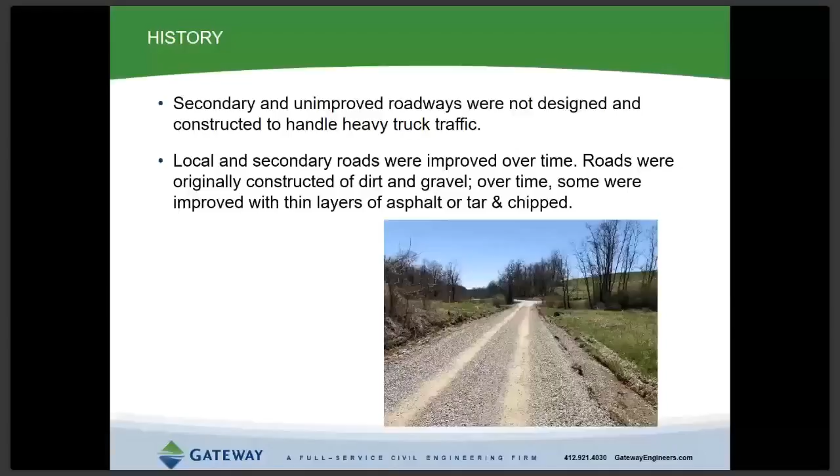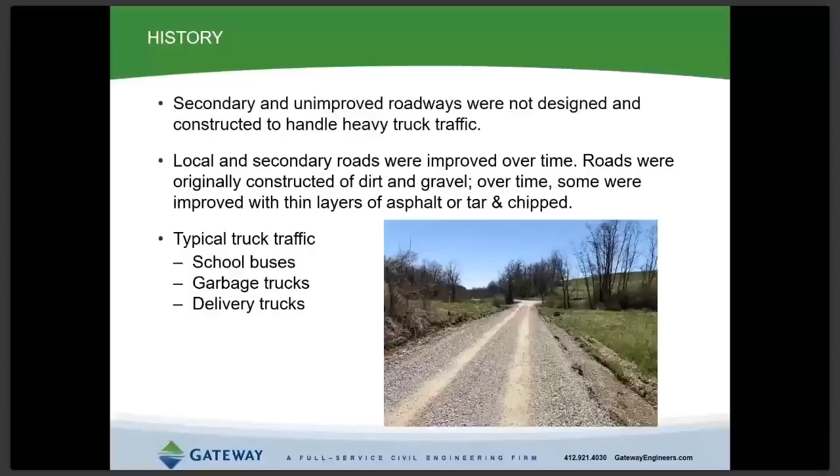It seems road improvement projects certainly develop, and road systems improve closer to the urban areas. On these rural roads, the secondary and unimproved roadways were not designed to handle heavy or excess traffic. The local and secondary roads were improved over time. They were originally constructed of dirt and gravel. Over time, paths were improved to travel sections, and then as time moves on, there were possibly thin overlays of asphalt or tar and chip. On these local rural roadway systems, truck traffic consists of school buses, garbage trucks on occasion, maybe delivery trucks. But the traffic counts are certainly down, as well as the size of these vehicles.

So what's new? The increase in natural gas drilling activity in Pennsylvania over the last 10 years is what's new. What does that consist of, and what impacts does the development of energy have? It's well pad development, drilling operations, completion operations, and pipeline construction. It's more so than just well pad development that seems to be at the forefront of it.

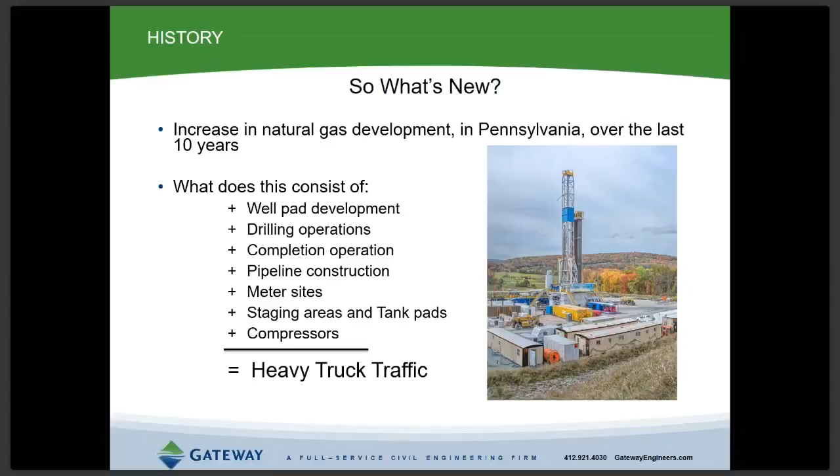Some of these components of development are considered a short-term project, meaning there's limited time to start construction until it's up and operating. The heavy truck traffic is needed in the forefront, then tapers off at the end and is handled by service vehicles. Other components, such as the well pad, maybe even a little on the compressor side, the truck traffic will continue for some time.

Some of you may have seen this in the last 10 years. What's a local government to do? Looks like a queue of about 25 water trucks.

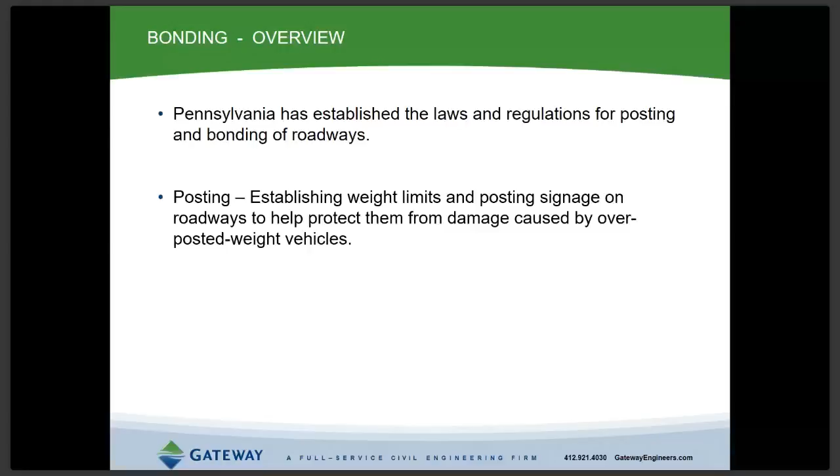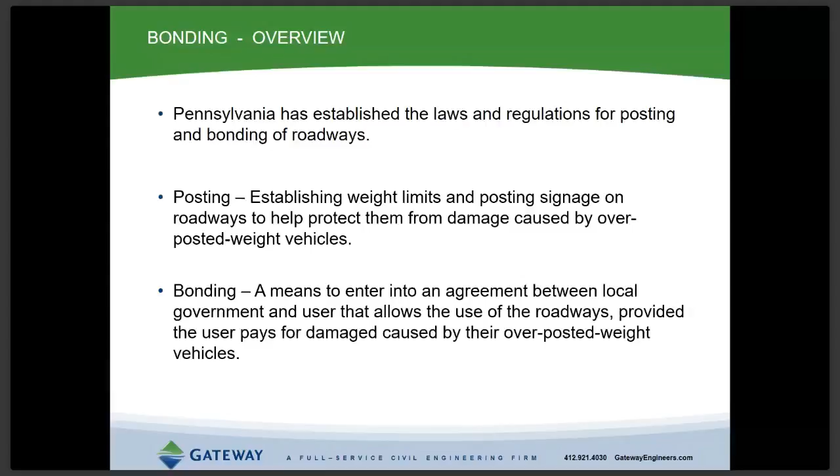The good news is Pennsylvania already had laws and regulations established for posting and bonding the roadway. Simply put, posting is establishing weight limits and signage on the roadway to protect them from damage caused by over-posted weight vehicles. The other component, bonding, means entering into an agreement between the local government and the user, the operator, the hauler, to allow for the use of the roadways, with the understanding that whoever is using them agrees to pay for damages caused by the heavy over-posted weight vehicles.

To post any roadway in Pennsylvania, it's recommended that you follow PennDOT Publication 221. It's a very good publication as far as the details described, including the forms and documents included as examples. I believe there are 6 procedures outlined in that document. We're not going to discuss each and every one, but there are several we'll take some time to review in a little detail.

First and foremost, under number one, the engineering and traffic studies. These are required upfront, in the initial phase of the posting and bonding procedures. There's an outline in Publication 221 of PennDOT that goes into great detail on what's required. On the initial engineering side, you're going to look at the vertical and horizontal clearance of the roadway, maybe even the turning radii.

You check past experience with highway breakup. That's probably more applicable to PennDOT, since a lot of the smaller local communities might not have a lot of history there. But what that means is determining, when reviewing and preparing these reports, how the road has reacted when used for hauling and truck traffic in the past. If there's a history of it, certain features and characteristics of that road would be incorporated into your study.

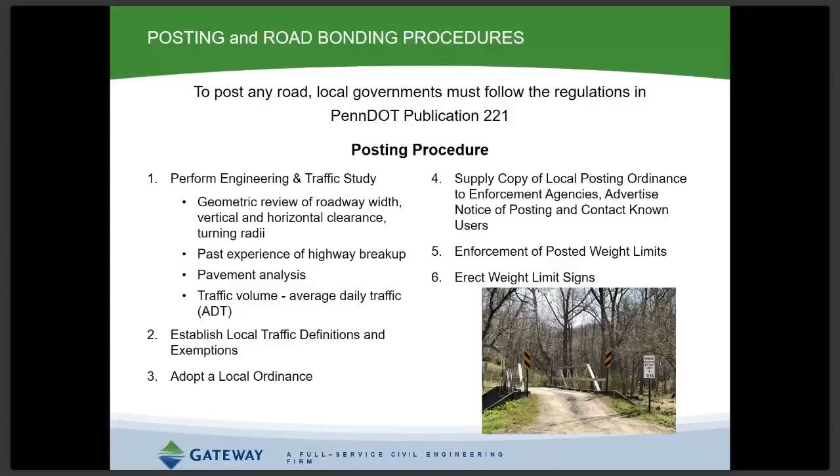There's a nice little bridge photo in the lower right-hand corner, more or less with a weight limit of 4 tons. Just so you know, posting of that bridge falls under a different section of PennDOT. You wouldn't find that under Section 221 — it would be found under Section 191.

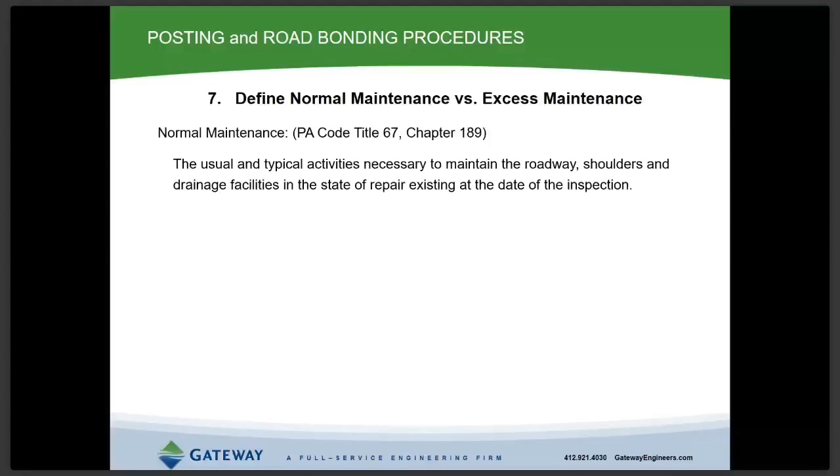Under item 7 is defining normal maintenance versus excess maintenance. What is normal maintenance? It's the activities people typically overlook on an existing roadway, prior to any bonding or excess maintenance agreements established for that roadway. That would be your inlet and culvert cleaning, for instance, shoulder grading, line striping, and snow removal.

Excess maintenance would be described as anything other than what was normal. If there's damage caused to it over time from heavy loaded overweight vehicles, that would be included in excess maintenance. Problems with the piping network, say it's crushed pipes, edge damage along the roadway, or even some instances, possibly even the reconstruction of that roadway, would be considered excess maintenance.

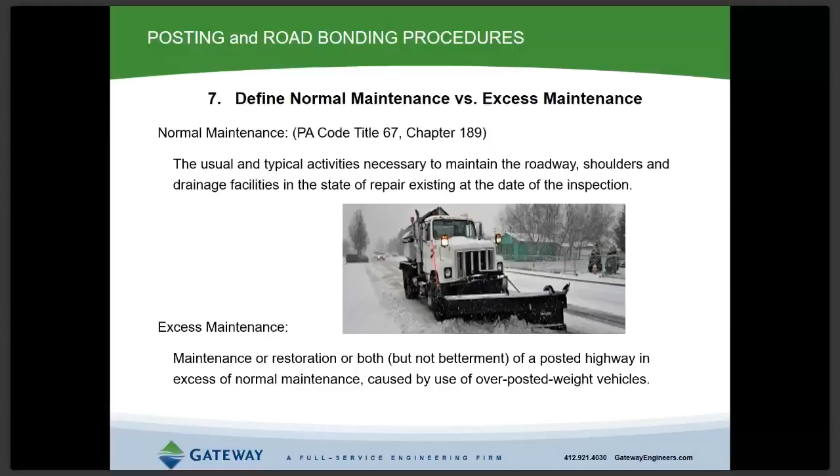Similar to bonding, it legally binds the hauler or the operator to be financially responsible for any repairs or damages that would occur to the roadway.

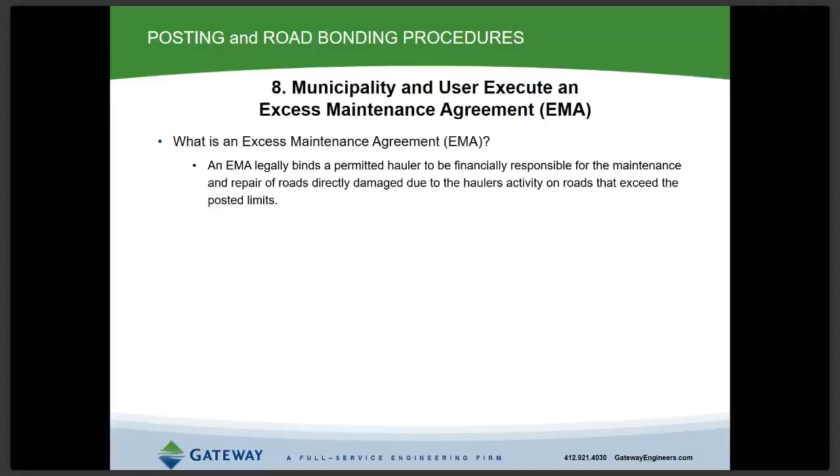In that document, there'll be three different types of permits available. Permit 1 is only going to be valid when it's carried in the vehicle itself. Permit 2 would be something that would be used if an operator or hauler would be using third-party services, when it would be impractical to have those permits located in the vehicles, but it'd be displayed at the place of the business.

Permit 3 would be used if there were several roads in and out of local government or the municipality that would be utilized. And not to be mistaken to point out that it's not a blanket permit for all roadways within the LG.

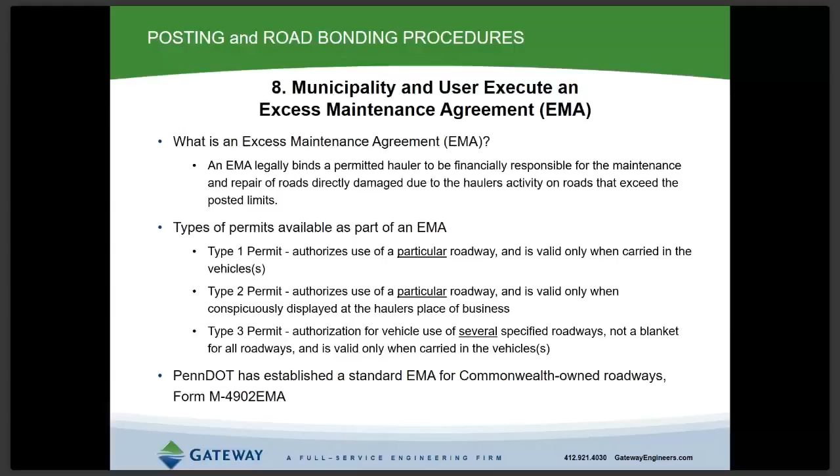Standards can be found on PennDOT's website. The M-4902EMA form, certainly beneficial moving forward.

We move on. We confirm under number 9, who determines who performs the road repair damage once the EMA is entered into and all parties have signed. What we typically find in our experience is the user would arrange and pay for the repairs. I suppose on occasions the municipality might see that it has benefits of doing that themselves, but it's just something that we normally don't run into. I don't know that they need to be into the road repair business.

Under number 10, we do run into this on occasions. The municipality or local government would notify the users of what's intended. Typically, we'll run into areas where you'll run into multiple companies utilizing the same roadways.

It's always recommended, PennDOT will do the same thing, that they have the haulers work it out. More or less, you stay out of that work and put it back on the haulers to determine who's going to take care of the maintenance and so on. Our experience with that, it's worked out really well.

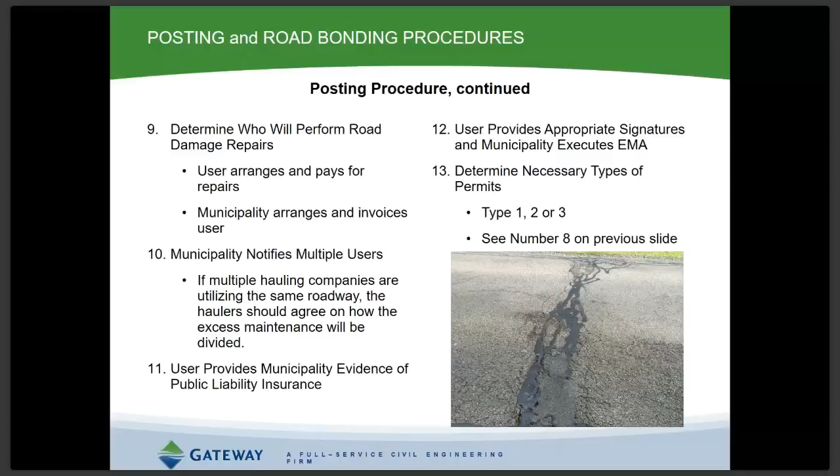Typically, impromptu meetings, the determination on who's paying and how it's going to be controlled just essentially gets worked out on the side of the road.

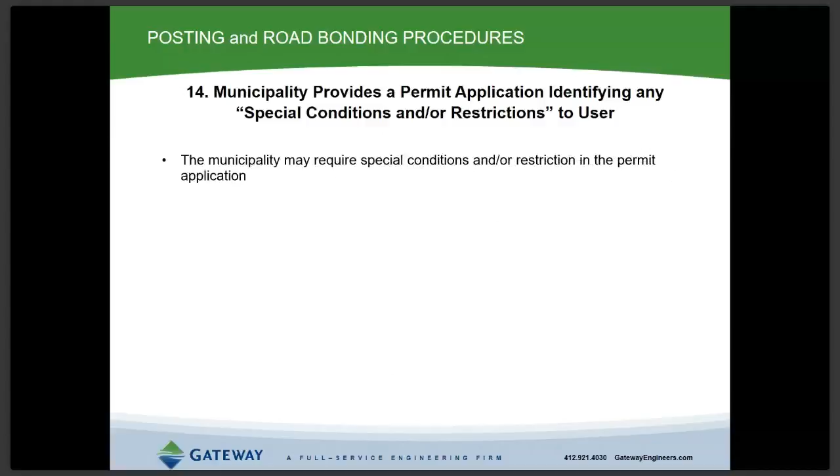During the bonding process, the municipality provides the permit application, identifying the conditions and restrictions to the users. This is a good thing. This is a time where the municipality can have additional influence on how they want things addressed and how they want handled.

Certainly, at this time, the municipality may require, we recommend that they do require the user to provide a maintenance plan. That maintenance plan is going to outline the minimum requirements, what's expected.

It's going to describe the results of the original initial inspection, periodic inspections, frequency of those inspections. In some situations where it's low trips per day, it might be a situation where that roadway only needs inspected maybe once a month. However, on high volume usage, it might be something as often as 2 or 3 times a week, maybe daily.

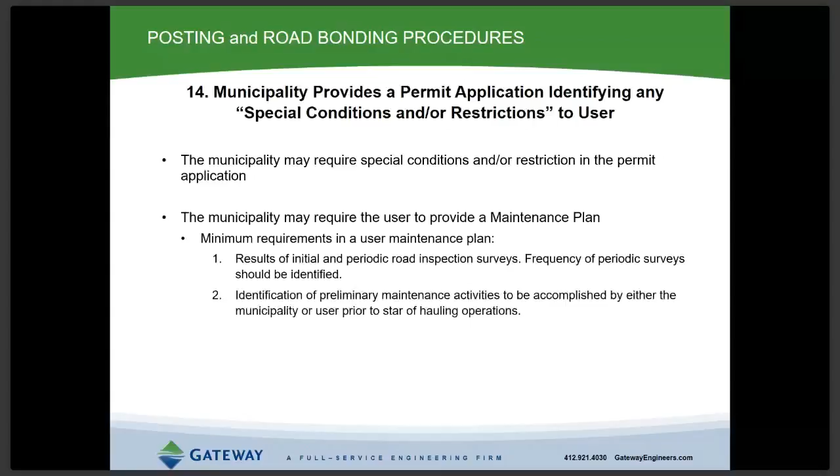It's going to identify the preliminary maintenance activities prior to the hauling operation. It's going to establish, determine who's responsible and the priorities of those repairs.

It's also going to provide an evaluation, an agreement on the alternatives that are going to be used for different distress types. I call this developing a cookbook.

Contains a lot of ifs and thens. Essentially, what's going to occur when we have the shoulder breakage? It's going to be a mill and fill situation. What's going to occur when the intersection begins raveling? And so on. It's just going to give you a general outline that can be used by both sides, from the user to the local government.

Maybe most importantly is item number 5, the response times, and what the expectations are there for the non-emergency repairs, as well as the contact and routine for the emergency maintenance repairs. The goal of this whole process is to keep the roadway surface suitable for safe travel. I think both parties are interested in that.

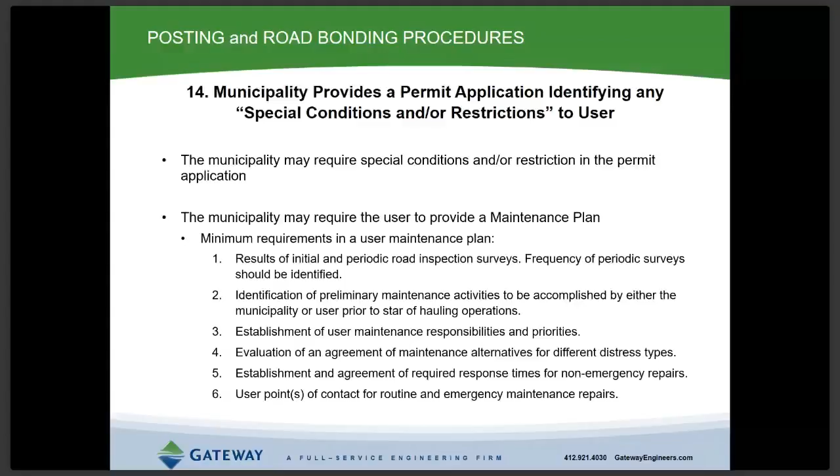Those amounts haven't changed for years. They are on the low end. Certainly, once repair and reconstruction starts to occur, those values there would quickly be exceeded, and we will mention and discuss that later on in the presentation.

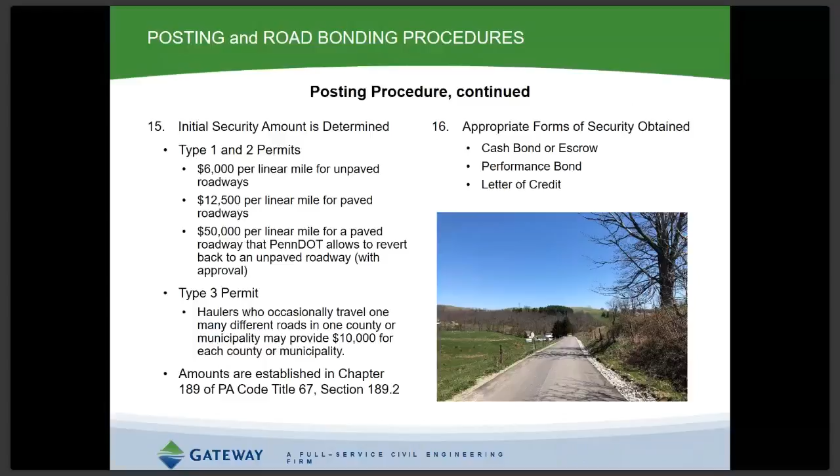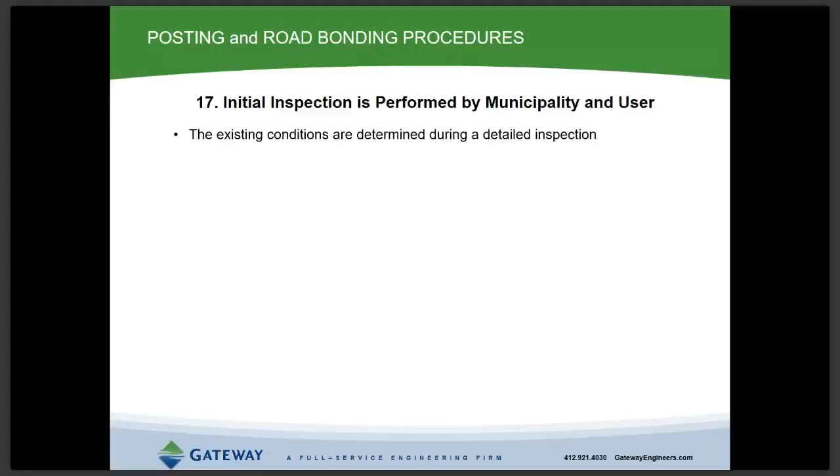Quite possibly the most critical part of the whole process is the initial inspection. Existing conditions are determined and detailed. Certainly take a lot of notes during this inspection. We recommend that both sides of the agreement are present to review that.

Essentially, once the bond is in place, the hauler or the user is only responsible for additional damage. If the road's in poor condition to begin with, they're not responsible to improve that at that time. So you certainly want to note all defects in those inspection reports.

We always recommend walking the roadways. We've seen it done in numerous ways, but you certainly note more information if the roadway is physically walked. That gives you the time to take a look at the culverts that people typically overlook, and drainage systems. But you certainly want to do that.

We recommend the use of video, whether it's a GoPro or handheld cameras, to document. I don't think there's any such thing as too much information when it comes to recording the existing conditions.

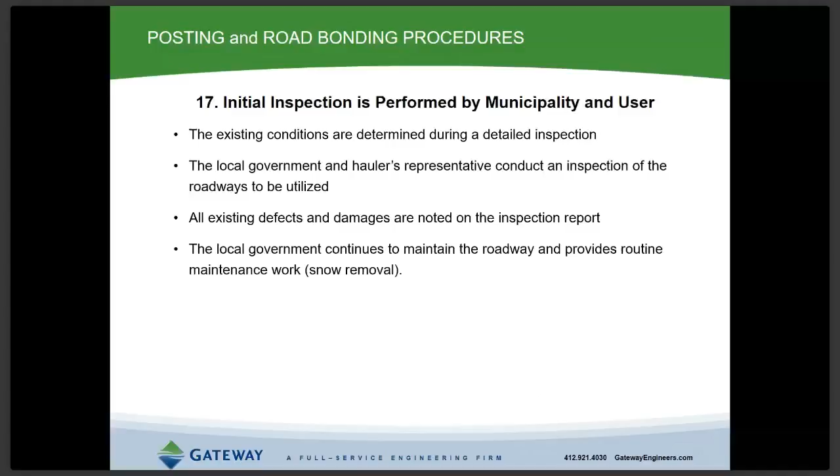One thing to note is during the EMA, the local government still is maintaining the roadway, and it continues with that maintenance work, that's snow removal. We have run into a few situations where once the road was posted and bonded, all activities stopped, and they tried to push onto the operator to handle the snow removal as well as the vegetation cutting and so on. So that is still their obligation as part of that.

As we touched on earlier, the hauler is not responsible for the existing conditions of the roadway prior to any work starting. One more note, make sure that you inspect the culverts and the drainage features. They may even be short span bridges that aren't posted. Note the condition of that.

Problems always seem to appear after the work is done. Just note for everyone, if there is a problem with the culverts or they need to be repaired or replaced, as the EMA is executed, having a bond in place doesn't relieve your obligations to have your 105 and your 102 permits in place.

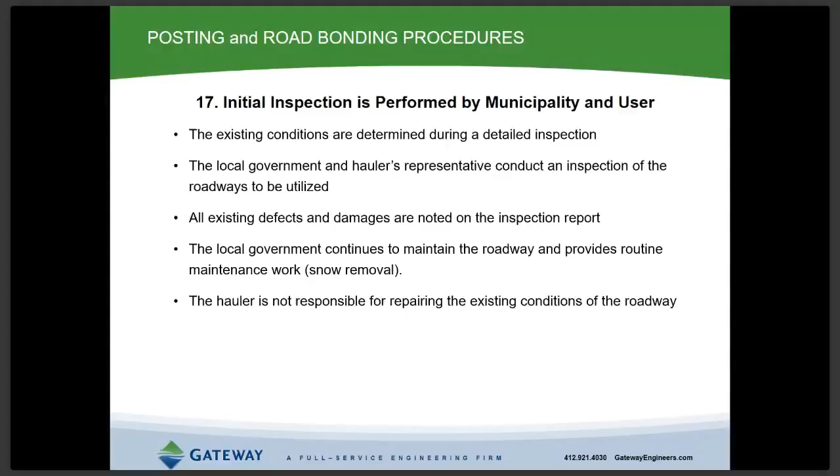Note the existing conditions adjacent to that roadway, whether it be a fence, mailbox, driveway, monuments, or pillars. Certainly record that. Who knows what will come up after the fact. It might be a good way to determine what the conditions were and if damages actually did occur.

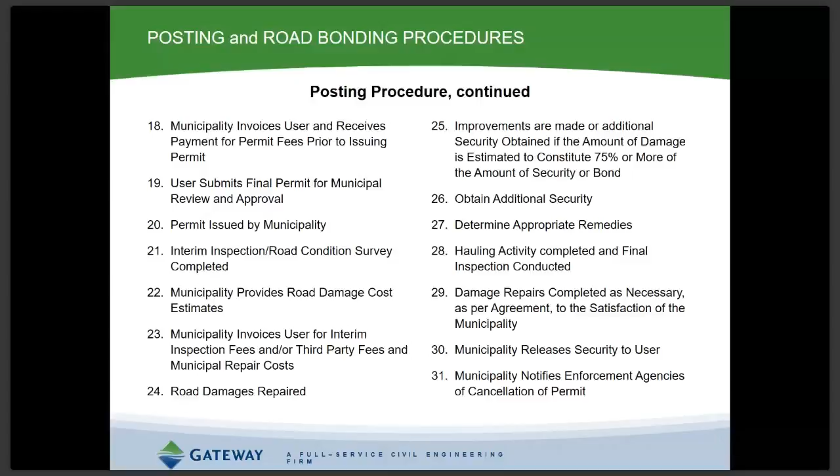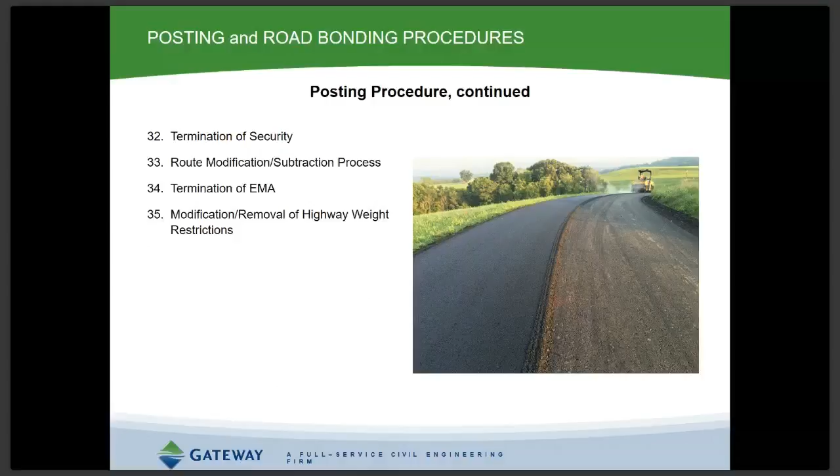Project success comes from cooperation between municipalities and operators. We use the 3 C's here at Gateway: communication, coordination, and collaboration.

Successful projects have all 3 components of the C triangle in place and executed. Under communication, we suggest opening up the lines between the local government and the operator, the hauler. Share schedules. It certainly helps with the stress felt on the administration side of the government, as well as on the complaint side of the operator.

Under coordination, especially when there are several different operators working in the area or sharing the same roads, there's internal and external coordination inside the hauler's place of business. There are many different components to it. So coordinate the repair activities. It seems simple, but you'd be surprised how often that comes up as operations change on the location, or as different phases of development occur. As truck traffic goes up, you'd be shocked how often that's exactly when the repairs are scheduled to occur.

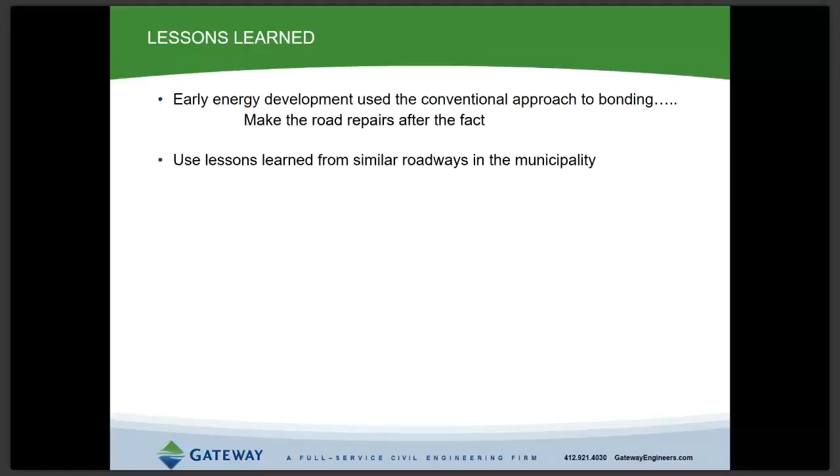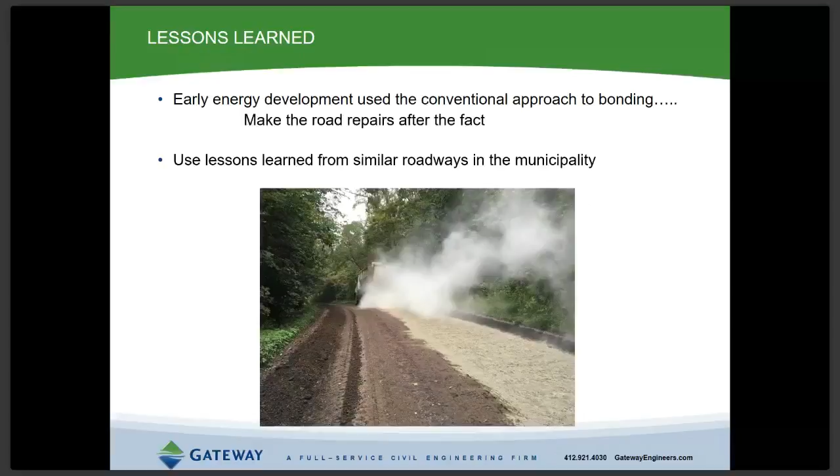Use the lessons learned from similar roadways in the municipality. This is a photo of base stabilization occurring, where cement additive is added to the roadway section. On these dirt and gravel roads, a very limited amount of base material was placed during original construction, so this gives you an adequate hard surface to work off of.

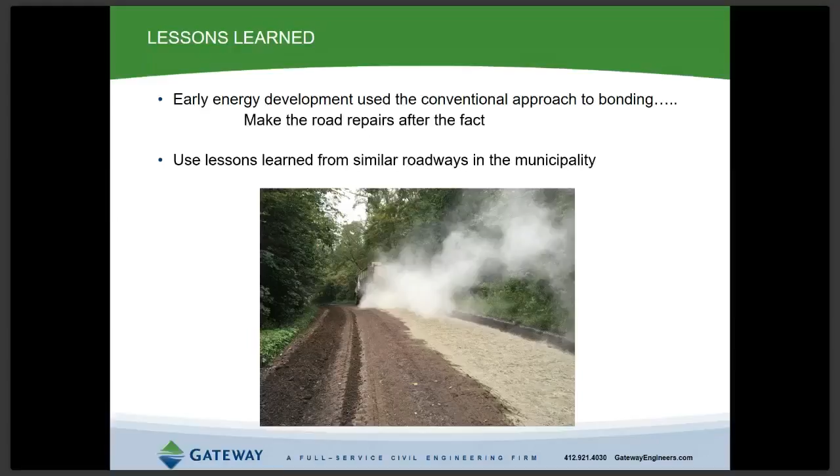Lessons learned from similar roadways: as energy development continues, it's not going to be a one-time project in your municipality. There will be other well sites or other components of that. Working inside that municipality, you'll have history on numerous roads throughout the area, so why not take advantage of that information ahead of time?

As energy development has matured, it's a good time to plan ahead. We always raise the question: why not make road improvements before the initial construction occurs, at the onset? Use the history you have. Typically in rural communities, the original construction process was essentially the same, and your soils and subsoils aren't going to change drastically. So you can anticipate what kind of damage will occur while that roadway is under heavy traffic loading. We've done this in the past and it's worked very well, but it does require planning.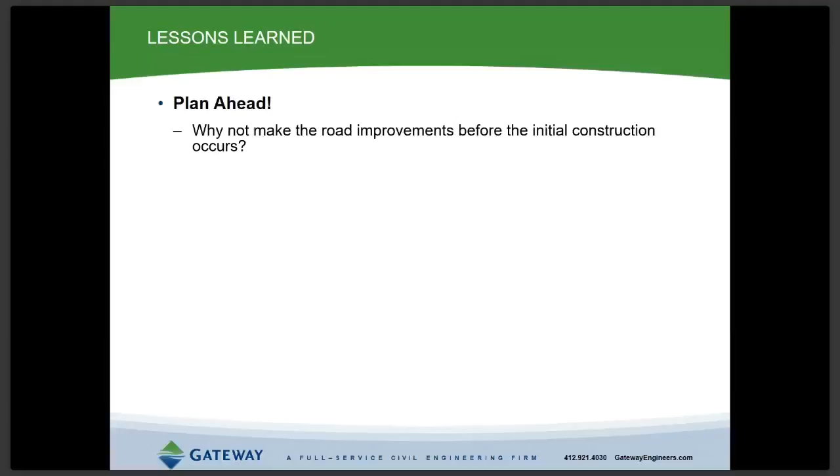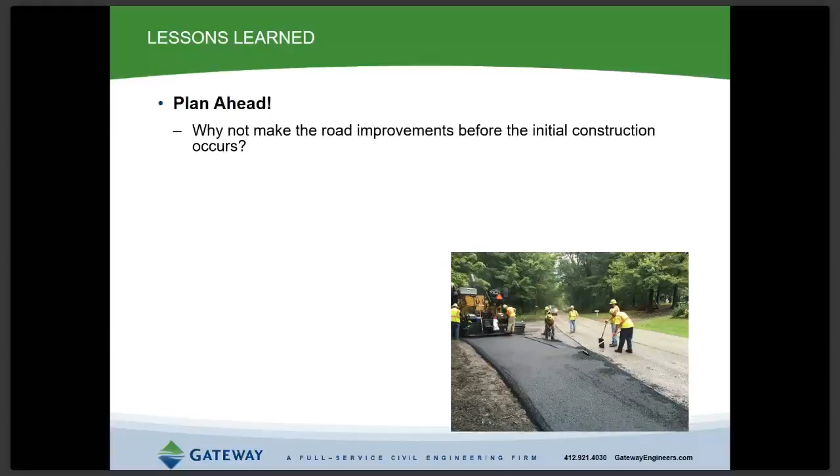You can move into that roadway, make your drainage improvements, stabilize your base, or do edge fillings and millings and fillings, install under-drain systems, and then go ahead with the initial paving.

Benefits that'll occur from that: certainly your local residents who use those improved roadways will be happier with the situation. It assists local government staff by reducing public complaints, and assists with traffic flow over the improved lanes. It also gives you a chance to modify the road geometry, possibly widening out existing narrow roadways so vehicles can pass safely - both the haulers' vehicles and the locals.

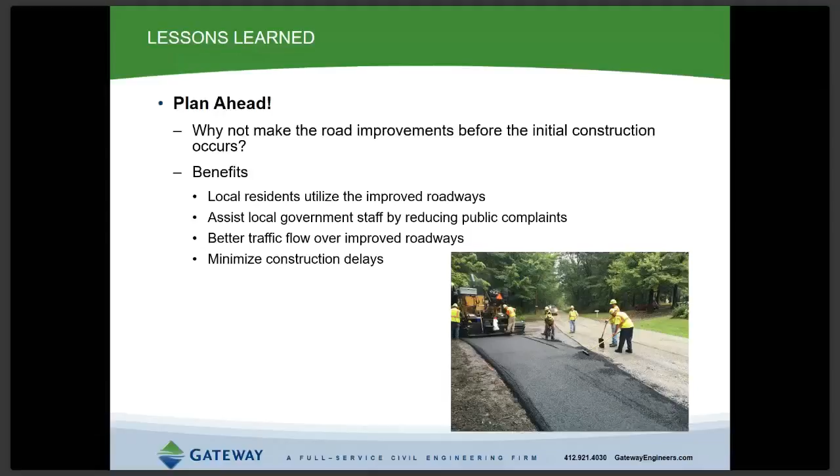Minimizes the construction delays. Quite often, as wells or as construction is released for construction, as the activities occur, here in Pennsylvania we're always trying to do a year's worth of work in about 5 to 6 good months of weather. So for energy or even heavy highway work, we're always pushing the weather limitations to gain as many days of construction as possible. There's nothing worse than starting projects late in the fall on the onset of winter and then finding out that the roadways aren't going to hold up. The roadways will cause maintenance headaches and nuisance issues throughout the wintertime. It makes for a long season because to do the roadways correctly, or to make those repairs, you're going to need suitable weather, and quite often dry weather.

This certainly extends the construction season by providing better access. Here in the southwestern portion of the state, you'll see in some documentation as the bonding goes - we didn't discuss it earlier, but you'll see seasonal limitations that are placed. Local governments can place that, PennDOT can place that. Here in the southwestern section of the state, we typically don't see the deep frost action that you would in the northwest or even the northeastern side of the state. That frost isn't a bad situation while you're utilizing those roads. The problem occurs when the weather warms and the frost is working its way out of the roadway, as we could describe it. It makes for soft conditions and can essentially destroy the roadways within a matter of hours, and certainly over a couple of days during those warming trends.

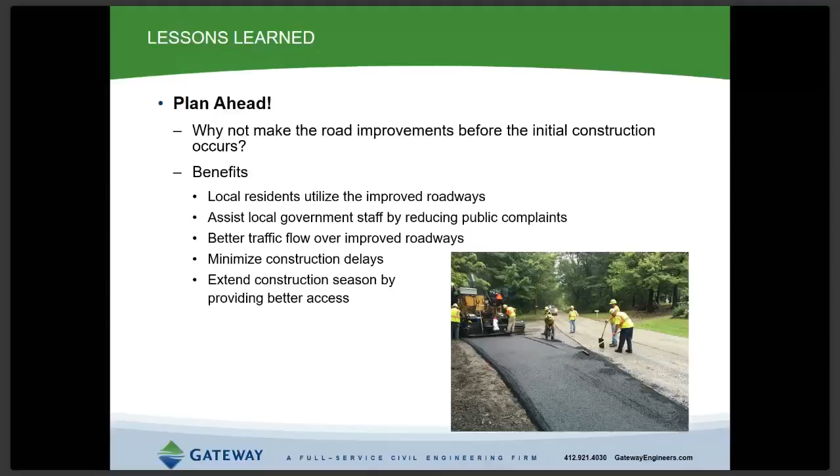Hey, Scott. Hi, it's Greg. Yes. You good, Justin? Okay.

Hey, thanks for the presentation, that was a great presentation. I have a few questions. So I was on my local council and I was in charge of roads for probably about 12 years, but we never bonded a road because we're in a tight little borough, didn't have a lot of development or obviously gas extraction in our little municipality. But I was wondering if the gas companies are generally open to these bonding agreements, or if you see any particular resistance at any point, or any particular topic in the process.

Well, Greg, I would say at the onset of the development there may have been some opposition to it. But both the local governments and operators we've worked with have matured over time. The EMAs are pretty typical - I don't know that there are many showstoppers in there. There's more planning occurring, more upfront engineering happening on the roadways, and construction plans are being prepared. So I think that's working out really well.